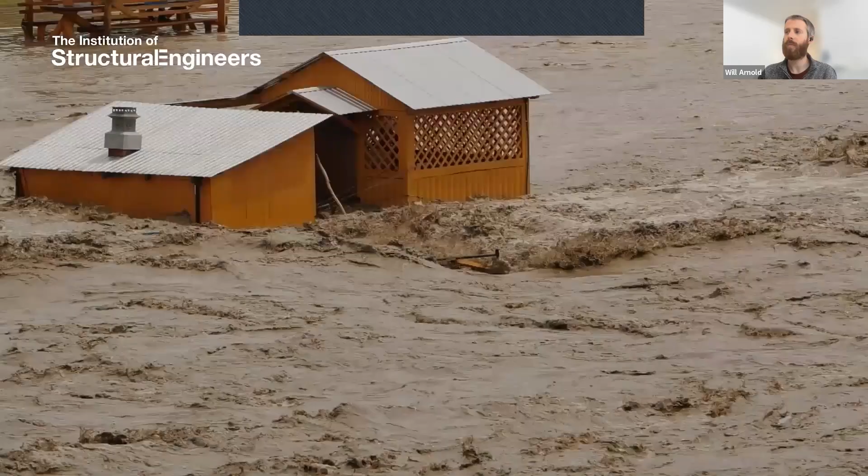We are experiencing record-breaking storms, droughts, fires, ecosystem collapse, climate migration, which has been brought about by human-induced global warming through years of excessive greenhouse gas emissions, including that from buildings and construction. As these storms and droughts and fires become stronger and more frequent, they will have a larger and larger impact on our lives. What are you going to do about it? We will exceed 1.5 degrees global warming around about my 40th birthday, bringing previously unprecedented heat waves to Europe almost every other year. By the time I'm my grandma's age, the world will be 2 degrees warmer, locking in as much as 4 metres of future sea level rise and destroying every beach you've ever visited.

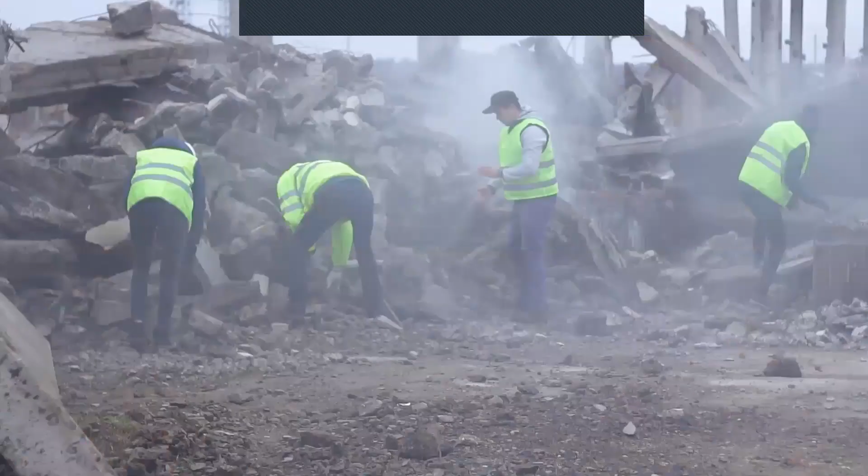Our families and friends are looking at a future of yearly weather cycles, currently thought of as once-in-a-lifetime events. And the financial cost will be measured in trillions of dollars per year. We must prevent this future from happening.

Almost 40% of the world's greenhouse gas emissions are due to buildings and construction. I'll try to put that number into perspective. Most of our personal decisions could be quantified in terms of kilograms of carbon emissions. So if you skip a steak, you save 30 kilograms of carbon. If you avoid flying from London to New York, you save 800 kilograms of carbon.

But in comparison, when the engineers, architects and client worked together to save this 1950s building from demolition and enabled its reuse as a high-spec office space, we saved 13,000 tons of carbon. That's the same as 16,000 flights from London to New York. Imagine the impact that could be made if we started making reuse decisions like this on every project.

We must take our professional responsibility seriously if we want to make the biggest impact we can on global emissions.

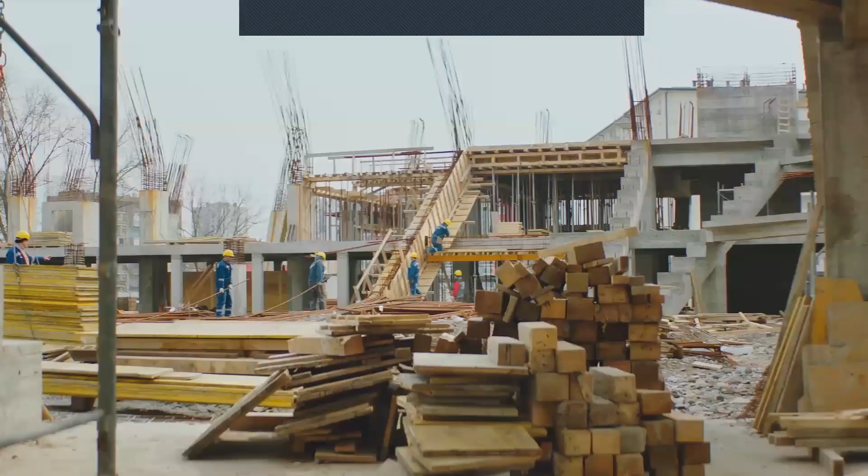The climate crisis presents not only a threat, but also an opportunity. An opportunity for me, for you, for all of us, to make a significant difference to the future of life on this planet. We can't afford to indulge ego and gratification. It's time to move away from taking pride in being the tallest, the longest, or the most heroic. We can do so much better than this.

This is an opportunity to create buildings and infrastructure which, by being the smartest, the leanest, the most regenerative, will make a positive impact on the world. Not just for today's generation, but for every generation after.

The Institution of Structural Engineers and our partners across the industry are providing the tools and guidance necessary to do all of this. Our profession has never been better equipped to reduce carbon emissions, and it's never been more important than now. At the institution, we've been working tirelessly to put sustainability on a par with our enduring commitment to life safety. But for lasting change to happen, this needs all of us.

The whole industry needs to raise our game. To drive the change we need to see, each of us must commit to something bold, and we must do it now. It's not the detail that's important, it's the ambition, the level of transparency, and the ability to track progress and strive for improvement. It's time to commit to doing things better.

Global warming will affect us and every single generation that follows us. So when you are asked by your children and your grandchildren about the role you had to play during the climate emergency, what will you tell them?

I still hate hearing myself speak, but there we go. Like I said, I'll share the link for that afterwards if anyone wants to use it to prompt this sort of conversation with clients and architects and others. So that, I mean, in effect, that's a very brief canter through what I'm going to speak about for the first sort of half of this presentation before I move on to giving you some resources and stuff from the institution. But I want to take sort of 15, 20 minutes now to dig a bit deeper into some of the messages in that.

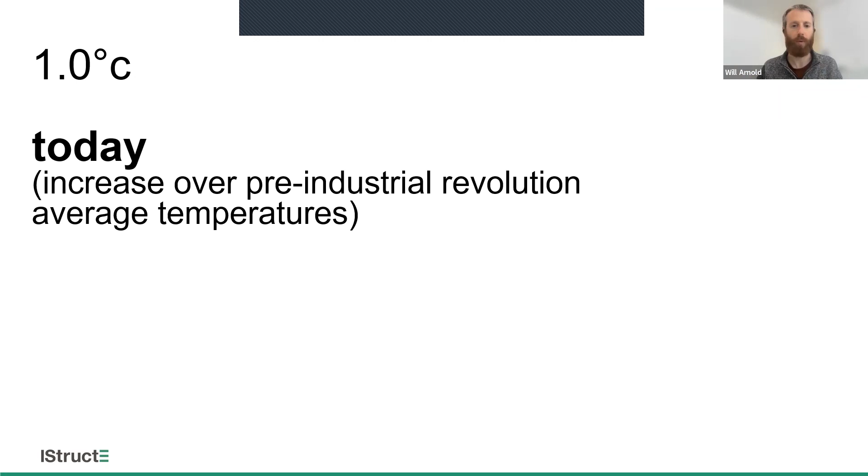As a reminder, we're currently globally on average at about 1 degree hotter than the planet was pre-industrial revolution. 1 degree doesn't sound like very much, but that's about where we're at, 1 or 1.1 or so. And there's a lot of talk about 1.5 degrees as being this sort of target to try and cap global warming to. At 1.5 degrees, flood risk around the world doubles. So it's not exactly a perfect outcome, but at 2 degrees, it practically triples. So there's a huge difference between 1.5 and 2, just in terms of flood risk.

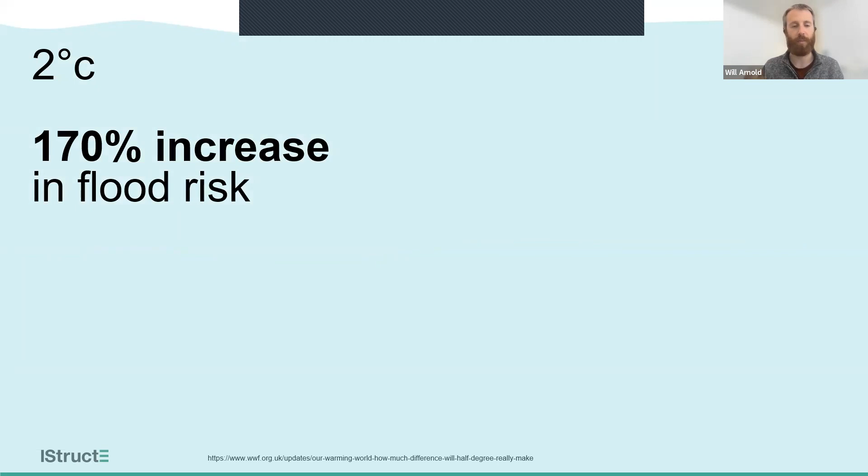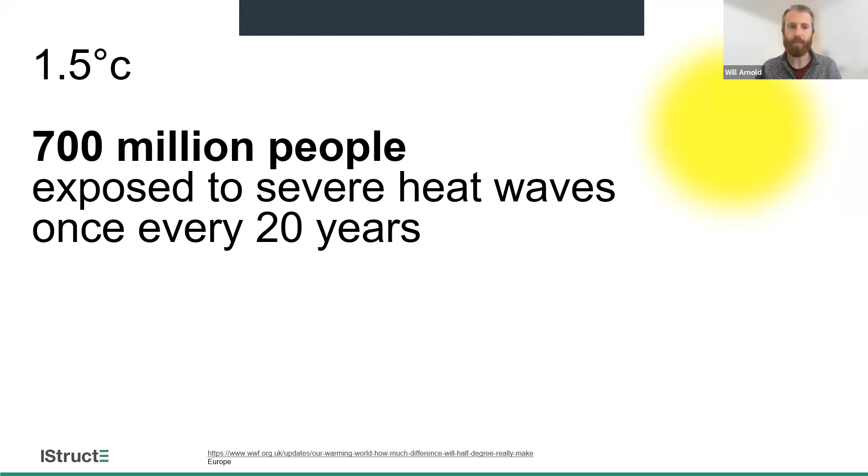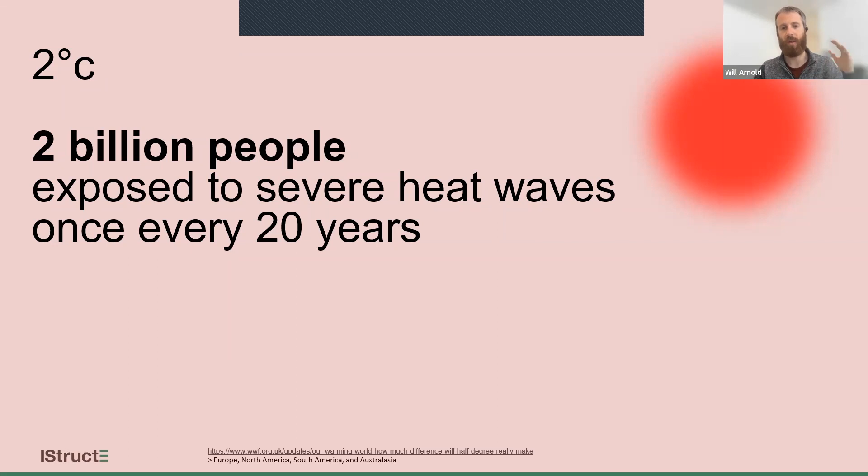And this is average, so if you live somewhere with a higher than average flood risk, this will be more extreme still. Similarly on heat waves, at 1.5 degrees, nearly 700 million people will be exposed to extreme heat waves every 20 years. So that's not a once in a lifetime thing, that's a 4 times in a lifetime type of thing. And these are heat waves on the scale of the sorts of things that kill thousands at a time. But at 2 degrees, that goes up significantly, and that becomes about 2 billion people, which by the end of this century will be nearly a quarter of the population of the Earth experiencing this every 20 years. So there's this huge difference between 1.5 and 2, and obviously 2.5 or 3 degrees gets more extreme still, and a lot of these predictions are sort of exponential.

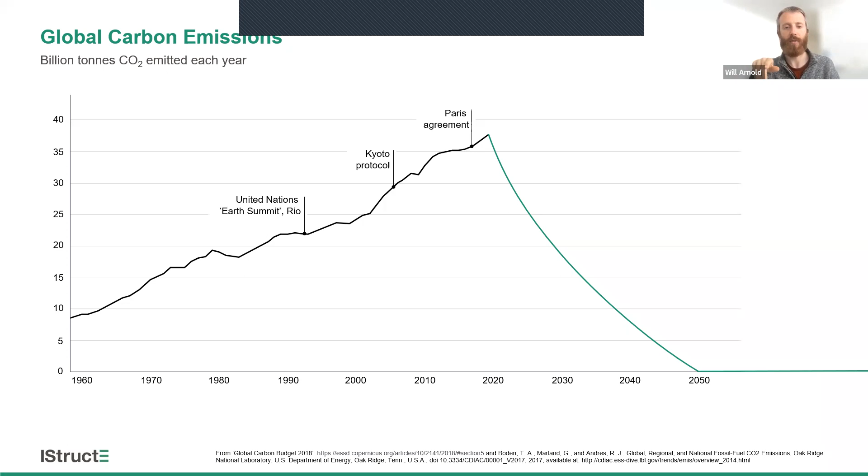Those predictions I was just telling you are all for the year 2100, and that can sound really far away, but I think it's worth reflecting on how close that actually is. This is my nephew, Bobby. Baby Bobby was born in 2019.

This means we're talking about things that happen to this planet when Bobby turns 80. He'll probably be retired, he might be a granddad. I'm sure all of you know somebody of Bobby's kind of age. I want you to picture that person for a second and then imagine them on their 80th birthday party, maybe blowing out candles, surrounded by family and friends.

That world that they're sat in is a world that we leave to them. When your Bobby or whoever it is that you know asks you what you did about it, I think you want to be able to turn around and look them in the eye and say that you did everything you could, right? So every decision you make on every project you work on will matter, and it will affect the future for people like Bobby, people who are alive today. I think that's worth having in the forefront of our mind through the rest of this presentation today and when you go back to work afterwards.

So the good news is that whilst that's all quite scary and gloomy, there's quite a lot we can do about it working in this profession. I've got a bunch of slides now to talk through how this relates to the bigger picture of sustainability, and then digging down into carbon, and then digging down further into structures in terms of impact.

The first thing to note is that carbon is part of a very big, knotty, complicated picture of this thing called sustainability. You can't really tackle one of the things on this slide without tackling everything else at the same time - you mustn't forget the bigger picture. All these things need tackling all at once: carbon, biodiversity, equality, education - they're all interrelated. The more you read about these topics, the more you realize that's the case. But whilst we mustn't forget that bigger picture, we've also got to remember that out of all the things on the screen, embodied carbon is where the structural engineer's biggest impact can be.

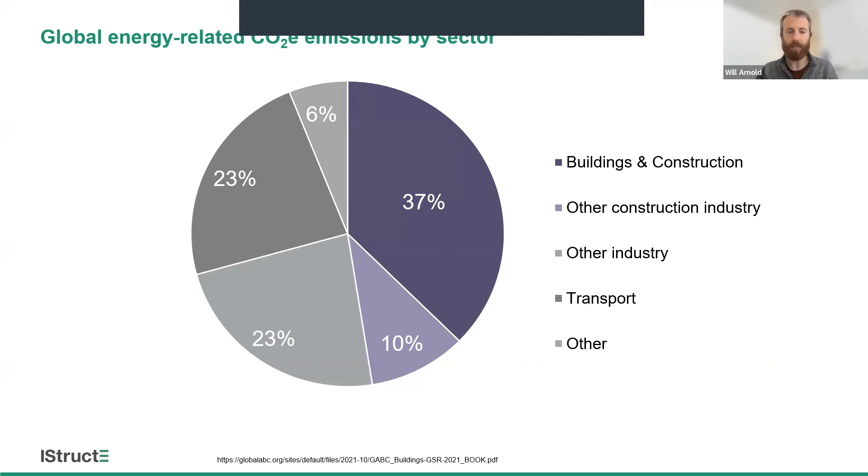Now, if you dig deeper into this and ask where structural engineering sits, it sits a bit like this - about 10% of the total, and most of that's in buildings and construction. There's a bit spread about elsewhere. 10% is the figure given by lots of things that I can reference.

The Global Alliance for Buildings and Construction publish a report each year - they say it's about 10%. I think you can prove that it's higher than that. I think it's probably nearer 15, or maybe even 20. And I say that because the cement industry alone is 7 or 8%, and the steel industry is another 7 to 8%.

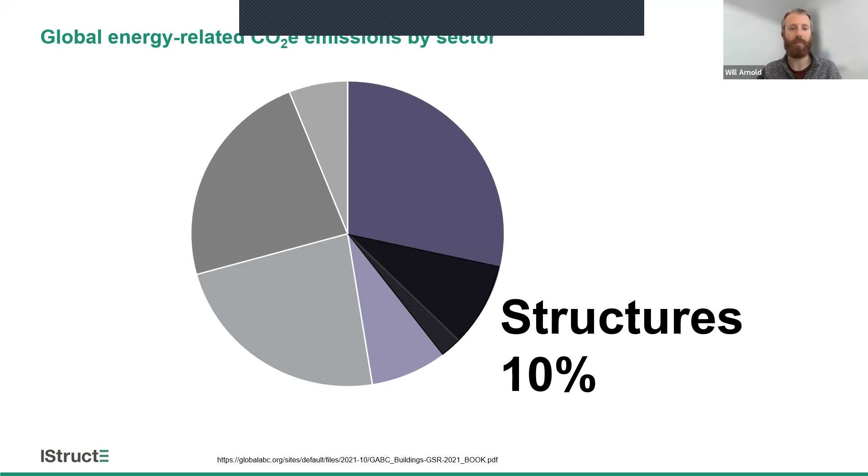So just those two materials, whilst they don't all end up in construction, add up to 15%. And I think the parts of them that end up in construction give you about 10%, and that doesn't include any brick, timber, gravel, or anything else. So I think we're probably more than 10% in reality, but you can justify 10 pretty easily.

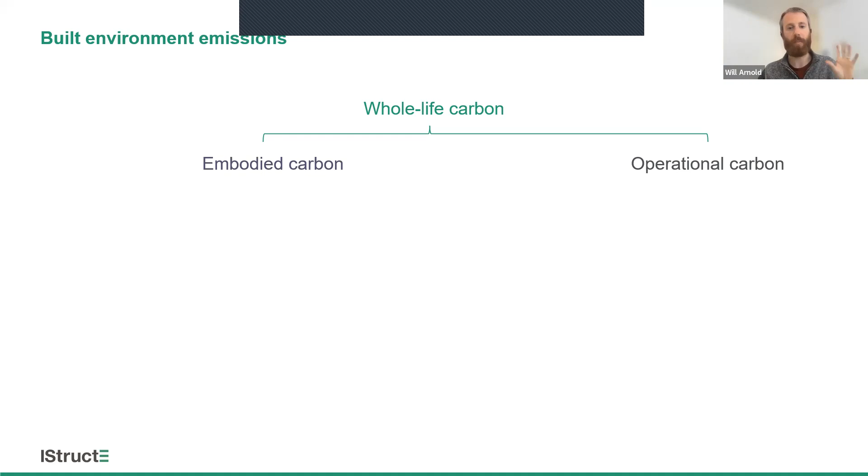So that whole life gives you a whole life carbon. That breaks down into one of two things: you've either got embodied carbon or you've got operational carbon. Roughly speaking, embodied is everything you can touch. So the chair that you're sat on right now has got embodied carbon related to it.

That embodied carbon includes transporting it to the place where you're sat right now, and it will include maintaining that chair, and it includes taking it away at the end of life. It's the same for the closest window to you, and it's the same for the floor slab that you're sat on. That's all embodied, anything you can touch.

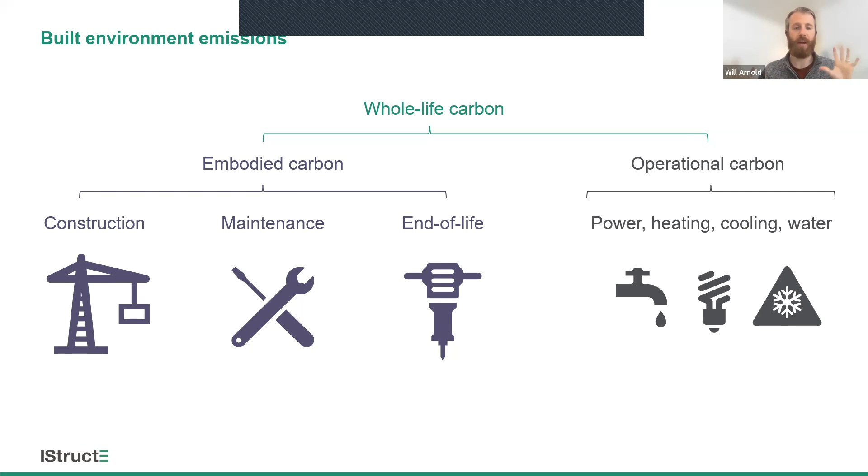Operational is then anything that you can turn on and off, which is sort of everything else. So that's your lighting, your power, your heating, your cooling, your water. And that's it, so it's as simple as that. Stuff you can touch is embodied, stuff you can turn on and off is operational carbon, more or less.

In terms of working out how much embodied carbon is in something, it's pretty straightforward. It's probably the simplest calculation you can do as a structural engineer. You need to know how much stuff you're putting in, and then you need to know what the emissions are per bit of stuff.

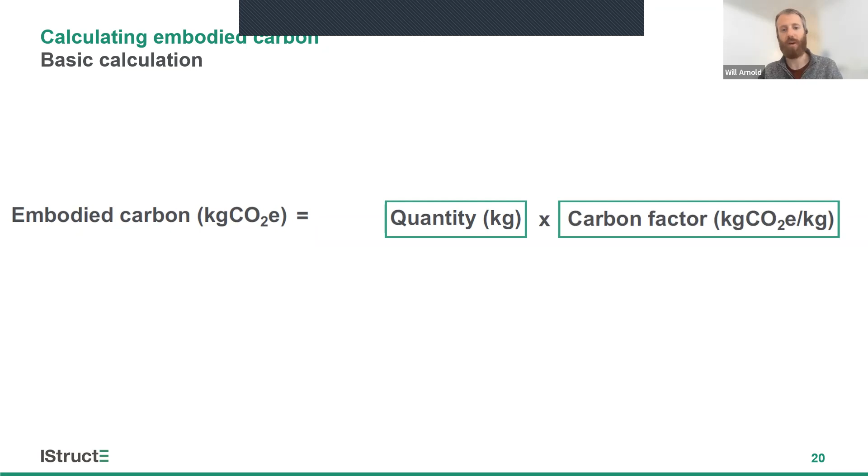So if you're building a brick wall, you probably need to know how many bricks and what the emissions are per brick, then you multiply them together. Then you need to do the same for the mortar, the same for the concrete and the foundation, so on and so forth. You add this up for all the materials, and that gives you the total. So it's pretty straightforward.

The difficulty with it is to do with accuracy, and to do with what you actually do with that number. The quality of information for both quantity and carbon factor will increase as you go through the process. Early on, you will have a rough feeling for how much material you need. You're probably fairly used to talking about these things in rough terms anyway, because for years we've been costing stuff, and the QS always wants to know for the bill of quantities.

But your carbon factor information will also be fairly rough, because you won't know precisely who you're going to buy your bricks from. So you might have a general idea because of who you got them from last time, or you might know that on average in your country the emissions per brick is so much, but it'll be general. Then as you go through the process and eventually get a supply chain in place, locked in with some contracts, you'll then know the exact carbon factor.

It's that increase in information as we go that means it's worth coming back to this sum again and again, to check that you're still on track to get to where you thought you were going. But the other point I made, about what you do with that, is what I think is really important to recognize here: the number itself isn't the important thing. I regularly say to people that if you can do this to one significant figure, it's probably good enough. The reason you're going to calculate this is to help you make the right decisions.

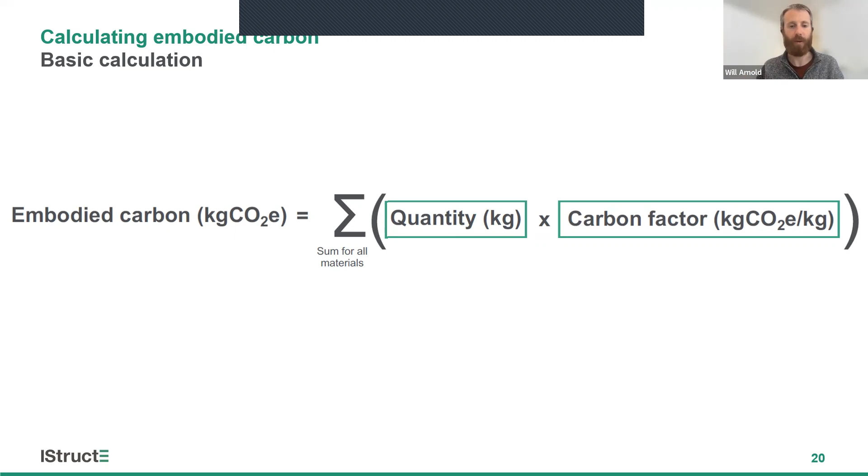Any replacement and repair you have to do later on will also be lower carbon than it would be today, because materials are going to change. So you've got this big lump of carbon at the start that we've got to stop from getting into the atmosphere, and most of that is the structure—typically about two-thirds of it. So you, and what you put on your drawings, represent the biggest bit of carbon that goes into the atmosphere on that project at any point in its life. And it's typically one or two materials, so in theory it should be quite simple for us to do something about it.

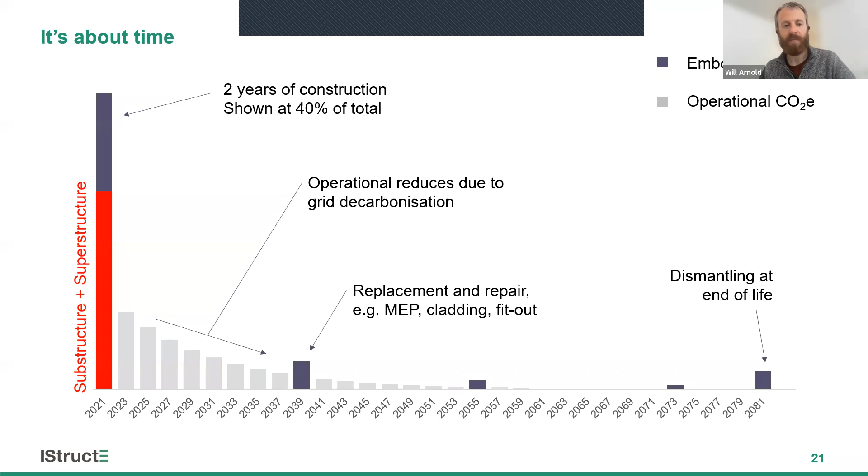Now that's the order of magnitude. What does that mean in terms of numbers? For perspective, a return flight from Johannesburg to Nairobi is about 1 ton of carbon, slightly less. So if you skip that and take a Zoom call instead with your colleague in Nairobi, you save 1 ton of carbon. That's good—1 ton is quite a lot. A moderate sized car weighs about 1 ton. There's quite a lot of carbon dioxide in that.

But this fairly typical steel frame distribution warehouse—when this was built, the structure, in fact just the steel in the superstructure, added up to 5,000 tons of emissions. That's 5,000 times as much as that one flight. And that will have gone out into the atmosphere within a few months due to construction. That doesn't include the foundations, the ground slab, cladding, the fit out, anything else—just the steel frame.

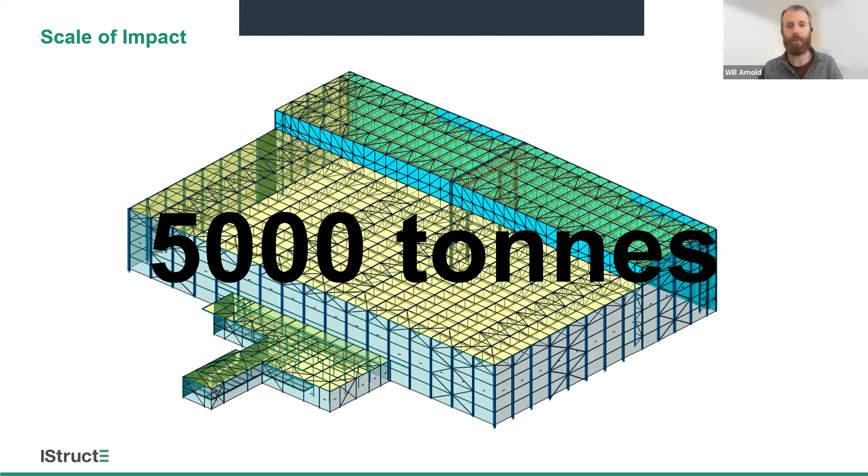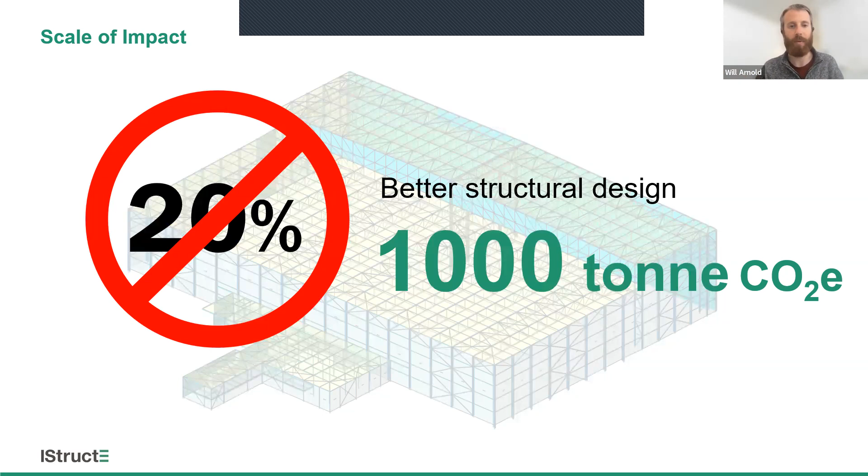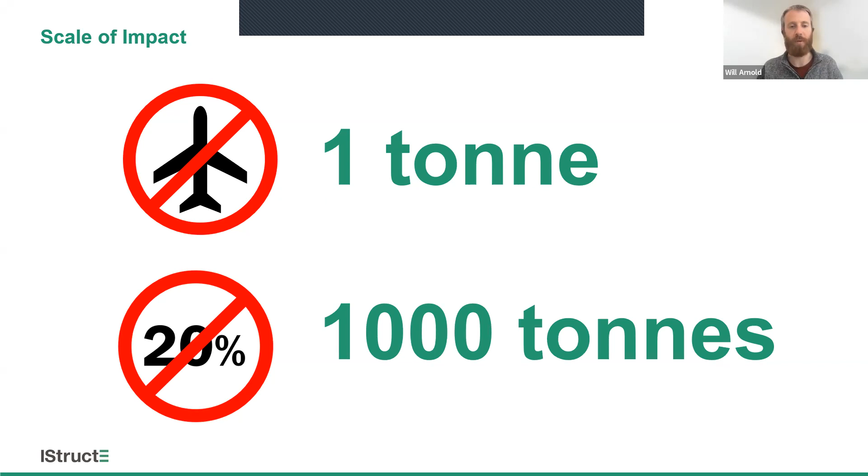What that means, of course, is that if you could have done the structural design 20% better—whether that's a reduction in frame size, a smaller footprint, or convincing the client to give you a bit more time to refine element dimensions—whatever it is, 20% better would have saved 1,000 tons. So our job, in effect, is to find that 1,000 tons on every project. And the reason you're trying to find that is for those things we've talked about—the green line and the future and all that kind of stuff.

There's a few barriers in the way, and I think it's worth talking about these up front. The one that gets me most annoyed is things like this: if you speak to people about sustainable architecture, they still expect to see something covered in trees. But if you do the maths, you find that actually, to build 1 square metre of office typically emits about 1 ton of carbon.

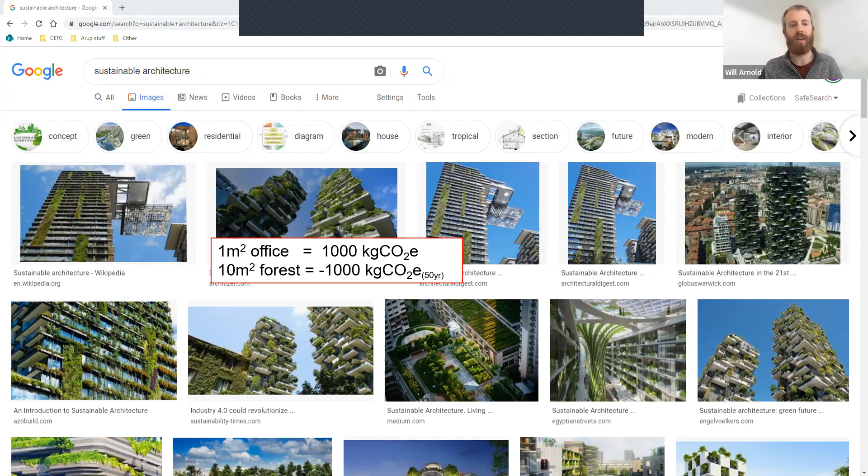And to absorb that same ton from the atmosphere, you need to plant 10 square metres of forest and leave it there for 50 years. So you see, the ratio of planting on these buildings isn't even close. This perspective, or this assumption as to what sustainable looks like, needs to change, and people need to understand that this is about real carbon savings, not about planting trees on the outside of buildings.

You've got statements being thrown around these days about tallest timber buildings and most ambitious this and longest that, which again, why does it need to be tall? Is that a good thing or a bad thing? Does it need to be tall? Does it need to be built? Should it be made out of timber?

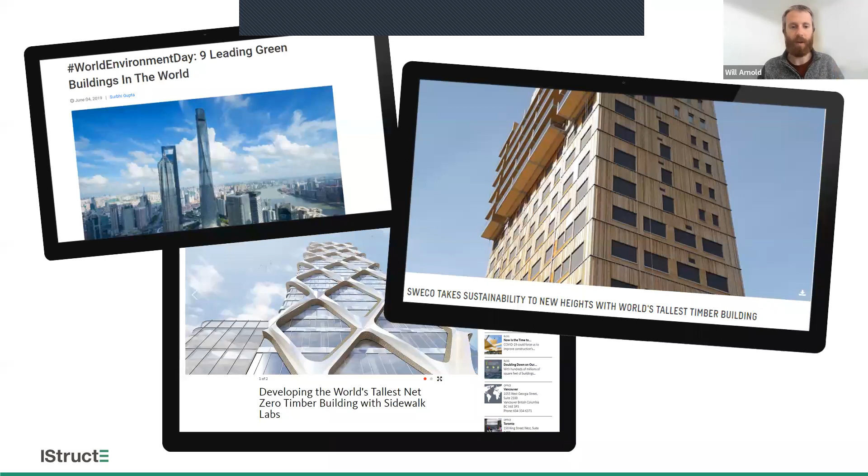Is it definitely lower carbon to have done that in timber than in concrete? Where did the timber come from? What do the transport emissions look like? How much timber have you had to use? What would the concrete option be? This assumption that you build it out of wood, therefore it's better. You have to do the numbers to be able to prove this, and that's why that embodied carbon calculation equation that I showed you is so crucial with this stuff.

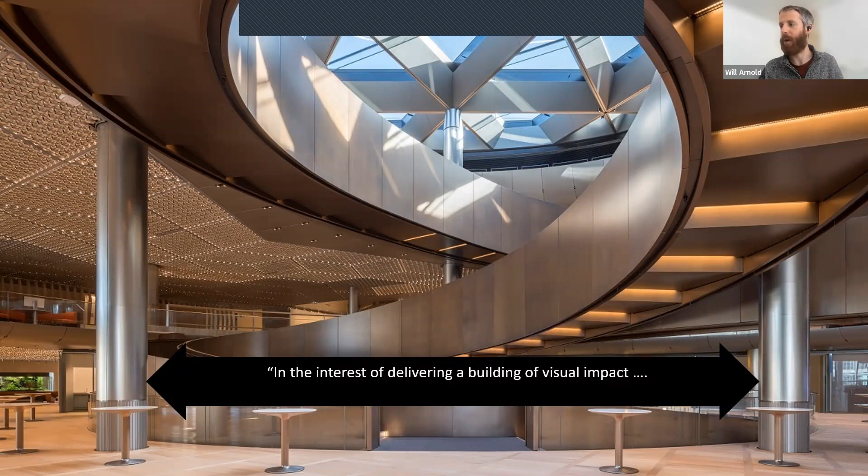And then you still have people fixated on operational energy. So a few years ago in central London, this project was unveiled as being the world's most sustainable office building, and it does loads of really great things in terms of operational energy, but then it makes all sorts of mistakes in terms of embodied. So the columns here are about 12 meters apart or 15 meters apart, something you can sort of work out from the balustrade height. And this is a quote from the client, a quote from the engineer about the client.

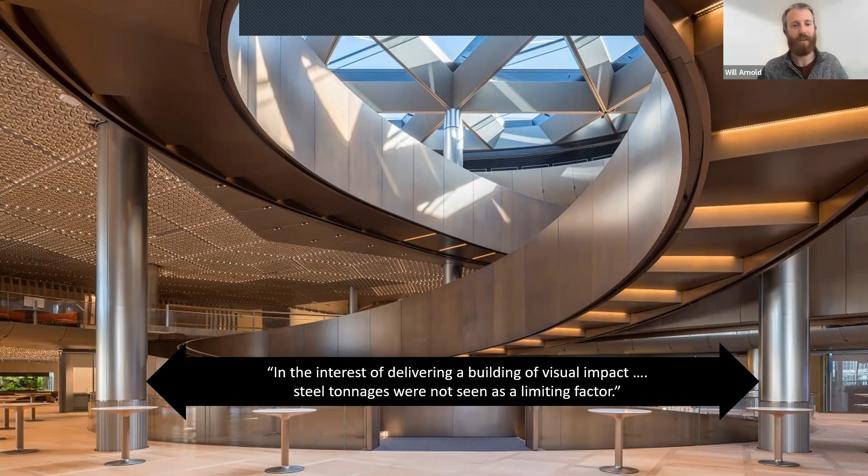Now, the engineers who worked on this are very talented and they know what they're doing, and they will have designed that building as efficiently as they could. But when you're being told by a client, well, just put things as far apart as we can get it for visual impact, you're off to a bit of a losing battle. And yet this gets quoted as being the world's most sustainable office building. It kind of stands in the way of it.

And then the last slide on barriers I've got really is about innovation. And there's loads of great innovation out there, and there's loads of really good, exciting things happening. And we need more of this, right? We need more R&D, and we need to get research onto building sites quicker. But of course, you can ask yourself the questions with this. Do you need a house to be made out of concrete? Even if it's 3D printed concrete, is that necessarily lower carbon than building a house of a different material? Could you build that house out of timber?

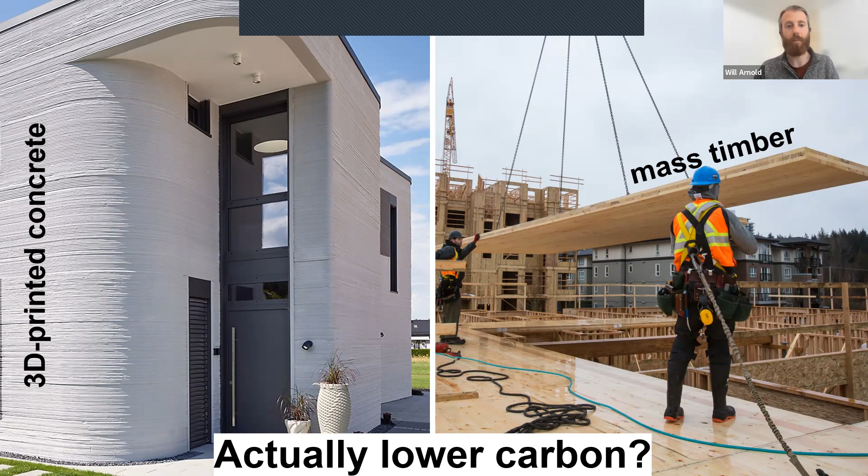With mass timber, things like CLT and glulam, did you need it to be mass timber in the case of the building that you're looking at, or would traditional joists have made more sense? Bearing in mind that a joist is 50 mil thick, and then there's a 350 mil gap to the next one. There's a lot of fresh air in that's been filled in with wood when you use a wooden plank like the ones on the screen. So again, you can start to answer all this with the carbon calculations, but you're pushing back against people who are assuming that one thing's lower carbon when it may not be, and we just need to get used to overcoming all that.

So that's the big picture, right? So that's about why this is important, what scale of impact we can have, and the sorts of things that we need to overcome to be able to have it. And that leads on to the rest of this slide deck, which is all about how you go about doing that, how you make those reductions, how you stay in business in a world that's asking for net zero this, net zero that. The first thing you have to do if you're going to stay in business in a net zero world, I argue, is calculate carbon on everything.

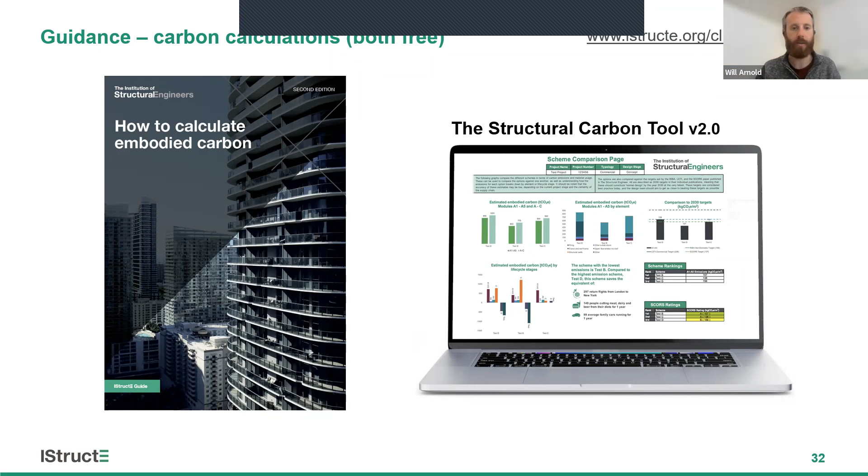So the institution has created lots of guidance around this. These 2 documents on the screen are both free, and they're free even if you're not a member of ours, because we thought they were too good to keep to ourselves. So there's the guide on the left. It tells you how to go about calculating it. It tells you how to treat different materials and so on. And then there's this tool on the right that goes with it. And the tool is basically just an Excel spreadsheet. It's really simple. It follows the same equation as before. You put in the quantities, and then it picks the carbon factors, and it does the maths for you.

So this one on the screen was a house that I got asked to take a quick look at for a friend. And it took me about 5 minutes to put in the information I needed because they already had a bill of quantities because they'd already done the design. So that was really quick, and then from that we could instantly start to see, well, there's a huge amount of carbon here in the insulation products that we've chosen.

So are there better insulation products? Is there a way to get less? Are we sure that the operational carbon saving through insulating better is worth expending all this upfront embodied carbon on? You can start to have those questions if you do the maths quickly.

This spreadsheet as well, it's simple, so it's quick to get into, but if you want to then edit it and change things, the password's in there, the password's carbon, because I'm not very inventive. But you can then edit it. And so there's engineers based in Switzerland who have taken this and made a sort of Swiss version, translated it into French, and they put all the Swiss carbon factors into the back end of it. So it does the maths based on what's more locally applicable.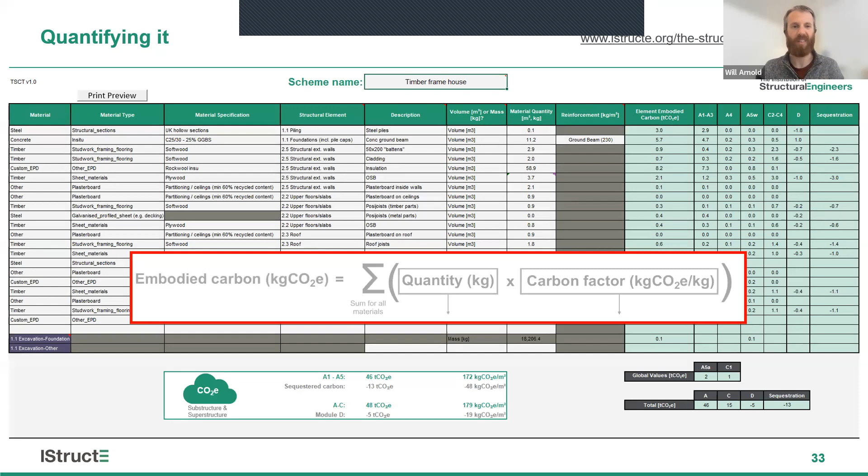And, off the back of Tessa's talk next month, you should be able to take the sorts of carbon factors that are coming out of that research in Africa, and again, make yourself a more regional specific version of this. And it's really quick to update because it's in Excel, and hopefully you will know how to use Excel.

Once you've calculated carbon, you then need to reduce carbon, like I said before, and we advocate this hierarchy on the screen here. So we start by saying, well, you just need to use less stuff. And then you can start to do some clever things with your specifying low carbon and then do some offsetting. And we argue that if you can successfully use less stuff, specify correctly, and then offset those residual emissions, that is net zero. That counts as a net zero building.

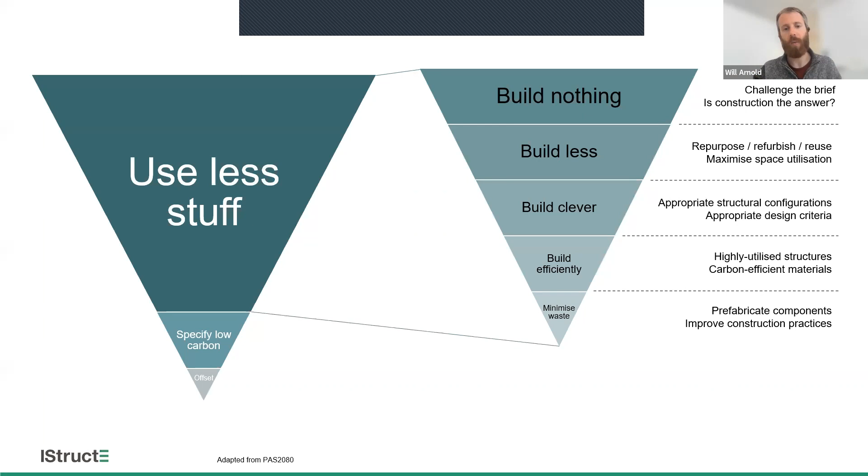Now, this is mostly about how much stuff you use. And the reason why it's about that instead of about doing something clever with your spec is because for the most part around the world, the low carbon versions of steel and concrete that are out there, they utilize materials that have already constrained resources. We don't have any more of them than we use. Well, there's a bit of spare capacity, but not a lot. And therefore, doing clever things with your spec won't make a big difference globally, whereas using less material in the first place always will.

So some examples of that, this is a refurbishment scheme, city centre in the UK, where the engineer was asked to look at knocking down a 1960s building and replacing it. And then they were also asked to look at a sort of refurb version with this extension on the left-hand side. And they demonstrated that the refurb, including the extension, was about half the carbon footprint of knocking down and starting again. There's a 13,000 ton carbon saving, 13,000 tons, 13,000 return trips to Nairobi from Joburg.

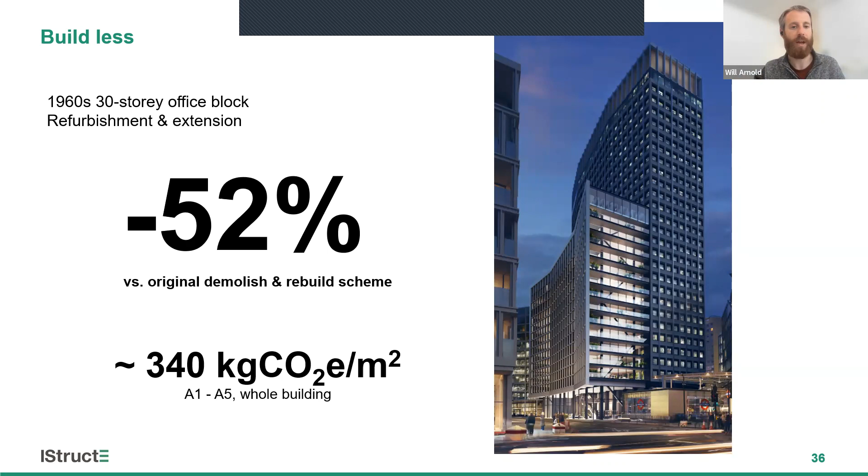So really significant, not the only reason the client went with the refurb. It was also quicker, it was cheaper. And there's all sorts of height constraints and sightline things and stuff like that. But this is a big part of the story. And now that they picked this, the developer talks about this quite a lot. They're pretty proud of the fact that they are half the carbon footprint of what they would have been.

Build clever, you're sort of halfway down that triangle I showed you before, which isn't on the screen anymore for some reason, sorry. The build clever piece, this is about structural configuration. So these two towers on the screen, the one on the left is built in London, the one on the right is built in Taipei, in Taiwan. Taipei has some of the world's highest earthquake and typhoon loading, so you got wind and seismic. London has a bit of a breeze, and that's about it. You hold onto your hat sometimes.

But the two towers are about the same height, and they use about the same amount of steel per square meter of floor area. And the reason why, despite the higher loading on the right, it's still the same amount of steel, is because the architect said to the engineer, what would be the most efficient structural layout of this? And then the architect followed that. And so that building on the right is about 30% less steel than its neighbour in downtown Taipei.

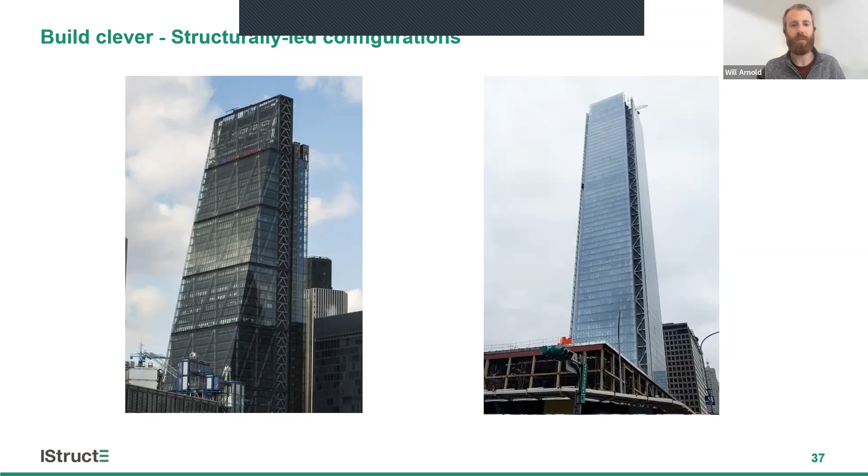And that 30% saving was only really achievable because this was led by structural configuration rather than other drivers. It's not to say the building on the left wasn't efficient, it wasn't well designed, but it had all sorts of weird constraints in terms of sight lines and things that meant that structural configuration was further down the hierarchy of importance. So you can get sort of 50% savings from reuse and 20 or 30% from configuration.

And then at the bottom of that triangle, on reducing emissions, you then get into building things efficiently, design, mass design efficiencies, constructing efficiently to minimize waste, things like that. This is your 5 to 10% saving region, I argue. So this is the difference between you putting out a set of construction drawings where you haven't yet done that final sweep through of optimizing element sizes versus one where you've managed to find an extra couple of weeks to do that, and you've trimmed some capacity out of things.

So you've got everything down to being nearer to a utilization of 100%. And you're confident to do that because you know that it's going to get built correctly, and you know that the codes of practice you follow have been designed correctly so that 100% utilisation is safe. This is why this is at the bottom of the triangle. You see the decision making behind reuse versus new builds versus the decision making about configuration versus the decision making on getting the last bit of steelwork out of your frame.

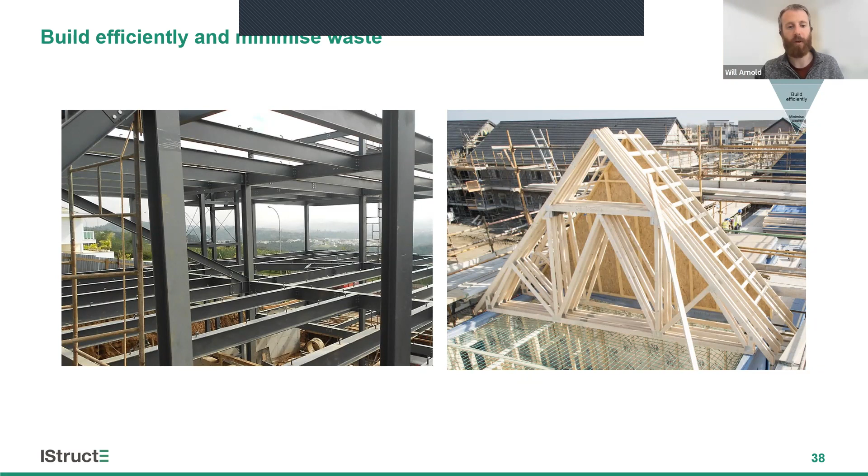They're kind of chronologically further along, right? So this is why we draw the triangle the way we do. Top to bottom is the same as starting the project to end of the project, but it's also big impact down to smaller impact. Doesn't mean that you shouldn't do the things near the bottom. Of course you should do them, and even if you made the wrong decision at the top of the pyramid, you should still do them. But it's worth bearing in mind that your real impact is the stuff at the top if you can do it. Of course, to reuse an existing building, you need there to be an existing building, so it's not always completely feasible.

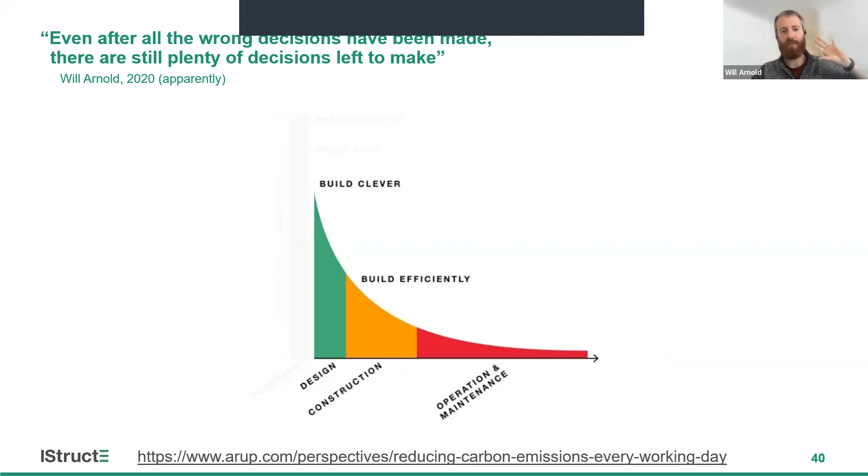And I think when you pull all this together, you can go around and start to look at the designs of things that have been built already and ask yourself these questions. Why is it a new structure? Why are the columns spaced apart as they are? Why is it in these materials? Why is there a basement, so on and so forth? There will have been decision making on all of that. And I'm sure that there were some very sound, economically driven decisions behind every single one of those choices. But there's a carbon impact to each of those as well. And if you can do some quick sums, you can tell people what the carbon impact is.

You can say new versus reuse, it's 10,000 tons of carbon. Column spacing, 9 meters versus 11 meters, that's 2,000 tons of carbon difference. Are you sure that's worth it to you as a client when, by the end of this decade, you're going to have tenants asking you how sustainable was this building when it was built? What does the carbon footprint look like? So it's up to us to ask these questions and to try and give some sort of metrics to go with them.

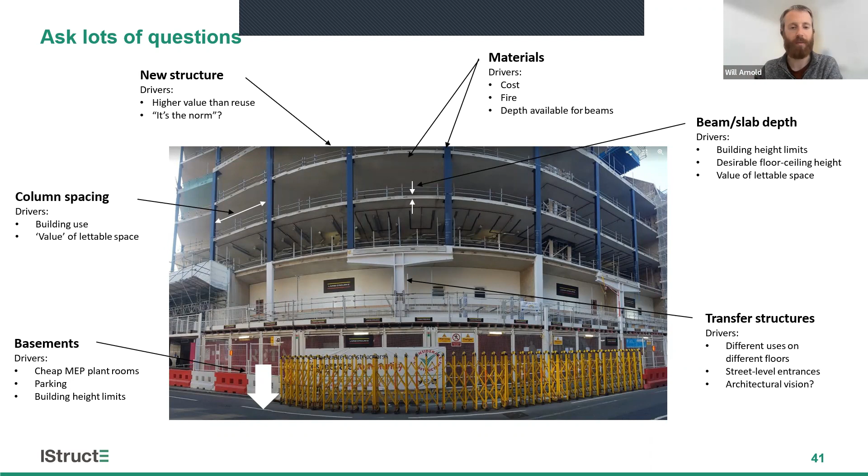And the reason to ask them is because of things like this. So this is a project. It's a fairly ordinary residential scheme that a colleague of mine worked on. And he was asked by the client after the building had been constructed.

The client said, could you come and do a review of what we built and tell me whether we could have saved any carbon in the construction, without changing the architecture or anything significant. He could demonstrate there was a 40% embodied carbon saving that had basically been missed through some optimization, material choices, and slight design tweaks, and 3/4 of that was cost neutral as well. Had those questions been asked earlier in the design process, not post-construction, they would have been able to save 30-40% of the carbon footprint of the building.

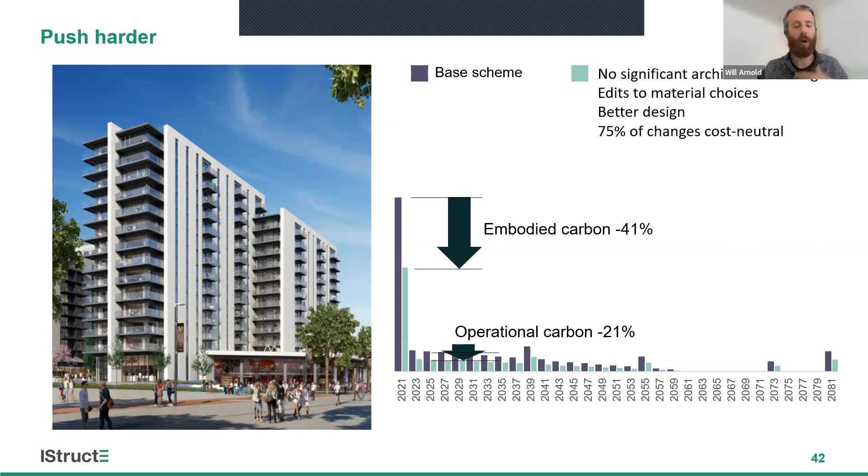It wasn't being asked, so it didn't happen. Those emissions have happened, and getting them back out of the atmosphere is pretty tough. But that's why you keep asking these questions.

And if you ever get that pushback of, well, hang on, I don't like the idea of going leaner and leaner and leaner - surely that's unsafe, things are going to start to fall down...

We've written some notes, and when we share the slides afterwards you can click the links. We've done some bits of guidance from people who know about safety, fire safety, and resilience, and they all come to the same conclusion: if you undertake your design in a careful and considered manner, if it's to code, if you're a competent engineer, and if you're given the time to do your job properly by the clients, there's no reason why you shouldn't be able to design everything to 100% utilization - lean design all the way through - if you've done that job competently. That's the conclusion they all come to.

So it's not about saying we're going to lose material and that's unsafe. It is about saying, look, if we are going to lose material, we need to be doing this job well, and I need the client to give me the time to do my job well.

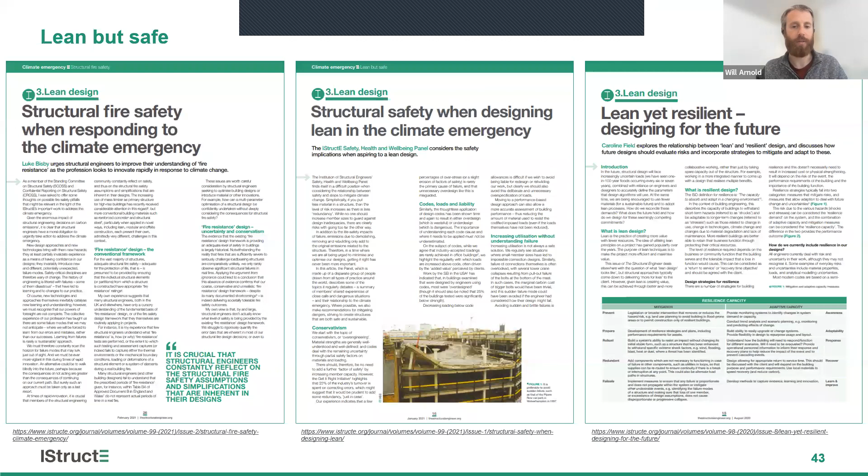Okay, last bit, and then we're going to move on to questions. I've just got a few slides on what we've been doing at the IStructE about all this, because we've generated quite a lot of guidance that will help you, and we've also tried to set the standard a bit higher within our membership.

That's because we recognize that a good structure contributes towards something efficient - in terms of its planetary impact, it's low, and it's useful for people, so in terms of social impact, it's high. The processes behind it are at the top of the game in terms of technical excellence - are you pushing the boundaries forward in how you design and construct? And in terms of profession, the fourth bit - are you doing this in a way that's collaborative, that shares with the wider profession? Does it increase our understanding and the respect we have from the wider market? That's how we're going to judge projects from now on.

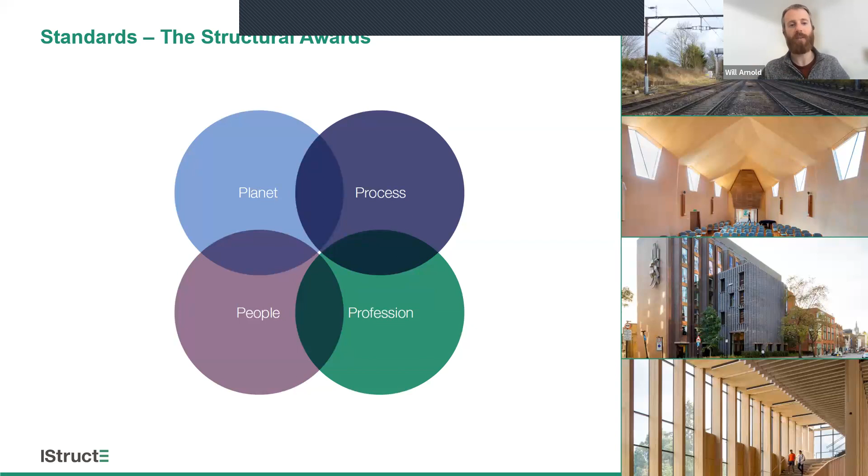So we're raising the bar, we're raising the standards in terms of our highest level of achievement. At the other end, then, there's your base level - what do we expect of chartered engineers, your entry level.

And that's being updated as of next year. These updates have been signed off but won't be implemented till next year, and there's more information about this online. In essence, you're going to be required to be able to calculate, talk about, and design for embodied carbon as a core skill. This is not an extra, this is not somebody else's job - this is our job as engineers from now on. That comes in as of next year, so we're going to raise the bar in terms of that minimum requirement.

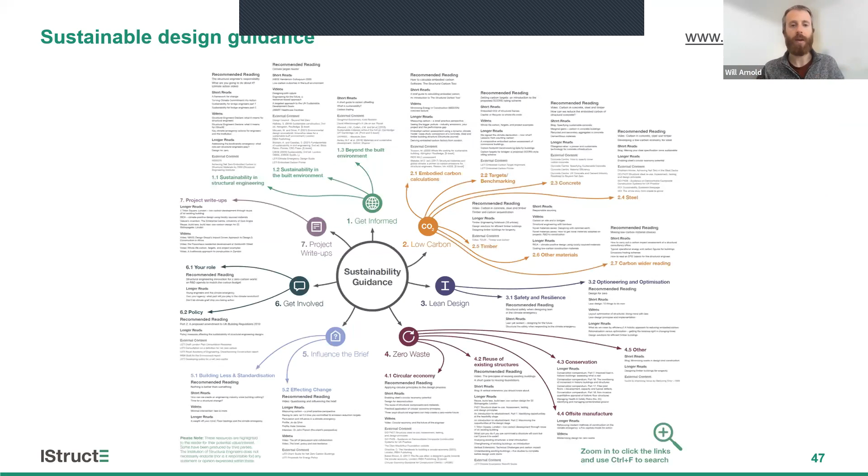And we're happy to do all that because we know that we've generated the guidance that's needed to help engineers to do this.

This PDF you can get off the internet on that link on the top right. It's got about 150 articles linked into it, which is quite a lot. We've put some recommended ones in there to help you find them easily, and you can search within here if you use Control and F, and all of those titles are clickable. So you can click video, carbon in concrete, steel and timber at the top of that recommended reading, and it'll open this in your browser.

About half of that's free if you're not a member, and the other half you'd need to be a member to get all of it. It'd be cheaper for you to become an affiliate member than it would be to pay for all of those, I suspect. But yeah, a good half of it is also free if you're not.

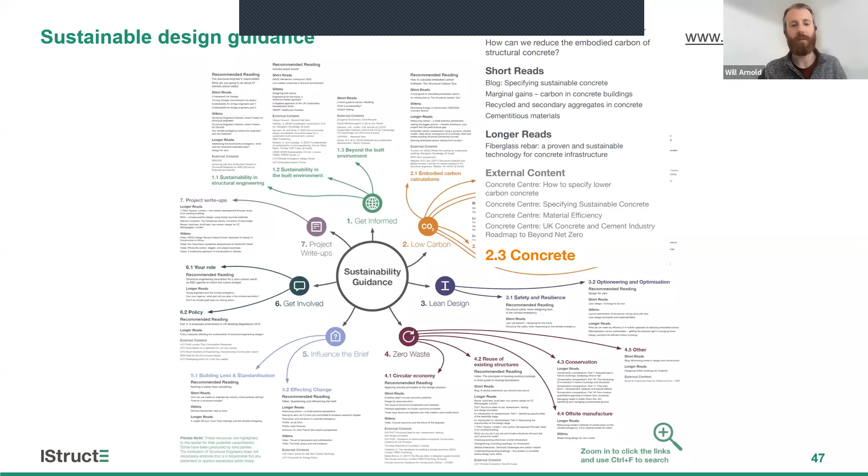So, there's loads of guidance out there if you want to learn about how you decarbonize concrete, how you use timber efficiently, how you reuse, how you strengthen what you've got, even all the way down to how you influence clients to try and go with you on this stuff. We've written guidance on it now, you can go out there and find it. We've produced guidance alongside this that's for those people who are maybe lecturing, giving presentations, writing articles, things like that.

You'll see that number 2 is reusing whole buildings, number 3 is about reusing components, parts of old buildings, and then number 4 is designing so somebody else can reuse the structure that you've designed. That would really help, because it means you can get through that quicker route to halving the carbon footprint of what you've designed by using things that are readily available. Even if it's just a bit of steelwork from the old building, like doing the top story of the new building with it, it all adds up pretty quickly.

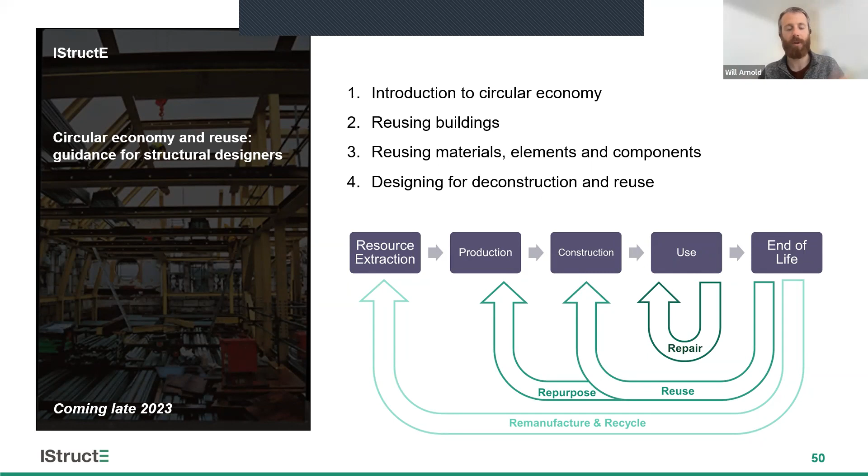If you're a member, you just search it on the website and it'll take you to it, and you can just click access now. It's basically a series of short videos with some quizzes in between to test your understanding, and you can do a CPD test at the end and get a CPD certificate. I think it's about 4 hours worth of CPD in total, and that'll take you right through the basics so you've got a really good grounding. That's the level we're setting people's expectations at for the chartered member exam, for example.